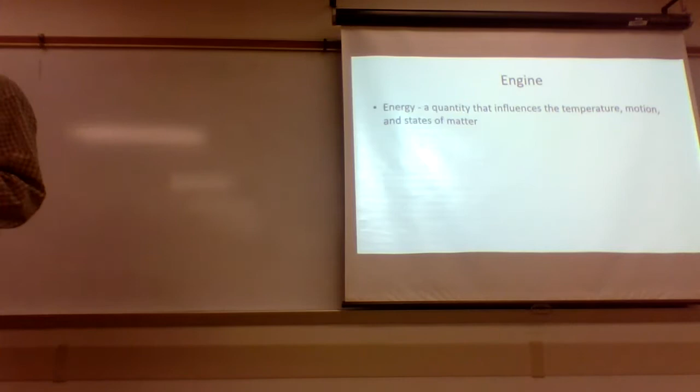So let us then move to the last topic that I put on the midterm. After the midterm there'll be a few other topics between now and the final projects, which we'll talk about as we work some guest speakers into the schedule. But this is the last topic that shows up on the midterm, and that's basically a simple study of thermodynamics.

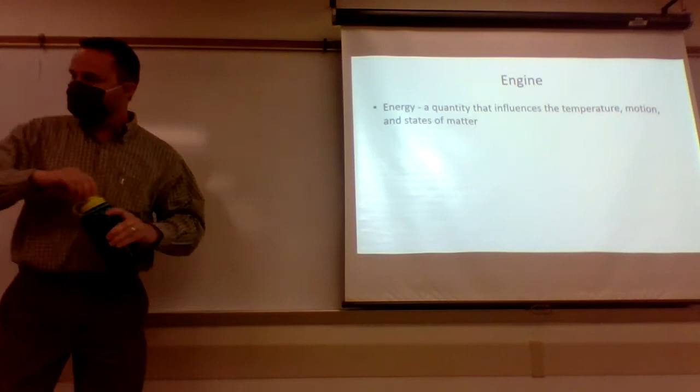Thermodynamics is the study of energy, and we have devices that manipulate energy. But let's start with what is energy.

Energy is simply a quantity. It's what we call a conserved quantity, kind of like mass or money, if you will. Money is kind of this conserved quantity — unless you're a federal government, you don't just create new money, right? There's a finite amount of it. Same thing with mass, there's just a finite amount. Energy is the same thing. There's a finite amount of energy in the universe.

And what is that energy? The difference there is it's not like mass where you can feel it, or money where you can count it. It's a little different to experience and measure, but there are some ways to do that.

What is it? Well, one of the best definitions I've seen for energy — this is kind of a paraphrase from a text we use here for Intro to Environmental Science. I was substituting for one of my colleagues one day, the topic was energy, and the instructor knew this was probably a good fit for me and asked if I would mind talking to his class for a day or two, and I said it's fine.

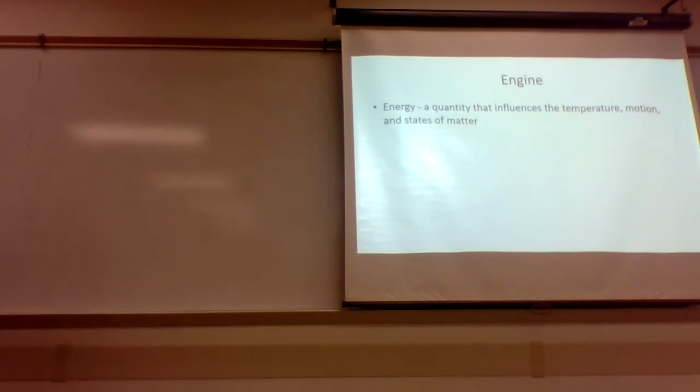And this was the definition, kind of a paraphrase of the definition from that text: energy is a quantity, and what does it do? Well, it influences the temperature, the motion, and or the state of matter. So it's pretty generic, but that's also fairly encompassing. It's this quantity, this amount, this thing that allows us to modify the behavior of mass, of material.

Now there are two devices we can point to, two generic categories of devices that affect energy, and that's engines and motors. Can anybody tell me, without looking ahead in the notes, what is the difference between an engine and a motor? Does anybody know that?

Electric? Electric would be a type of motor, yes, and that's the most common type of motor that we see. It would be an electric motor. All right, anybody else want to contribute? What's the difference between an engine and a motor, or maybe examples?

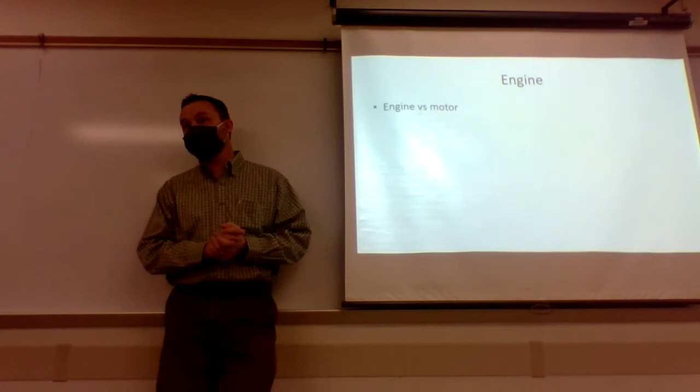Is it one converts energy, the other uses it? You're on the right track, actually. It's how they interact with energy, and they both convert energies. It's what types of energies they convert that's the difference. So a motor is a device that converts one type of mechanical energy into another.

Again, the electric motor is the most common motor that we see, and it might seem kind of weird to think of electricity as energy, but electricity is flowing electrons. That's what electricity is, moving electrons, either flowing all in the same direction, or in the case of AC signals, moving back and forth in a concerted effort. Mechanical energy is when all of the objects, all the particles, the molecules, or in the case of electricity, electrons, are doing the same thing. They're moving in an orderly fashion.

That's mechanical energy. Thermal energy is when you have this chaotic energy, or chaotic motion of the particles involved. An engine is a device that takes chaotic thermal energy and converts that into a mechanical form, whereas a motor takes mechanical energy and converts it to some other type of mechanical energy. Electric motors are the most common motors we see.

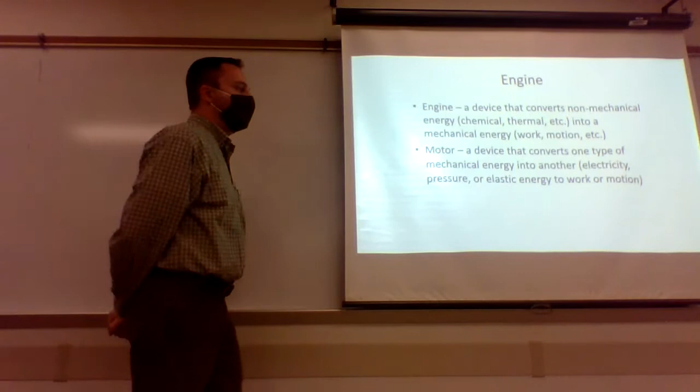Another type of motor might be a hydraulic or pneumatic motor, where you're using pressure or some kind of flowing fluid to generate the mechanical energy. That's also a motor. Whereas an engine typically has some kind of heat source, converting stored chemical or nuclear energy into heat, then using that massive amount of heat to generate mechanical energy, motion, and get all the particles or molecules moving in the same orderly fashion, most of the time in rotation, just depends on what we're doing.

So that's kind of the technical difference, okay? So within that, what do you think are... I'm gonna grab a red pen here. Let's see if this red pen's okay, that's not too bad. So what do you think are some types of energy?

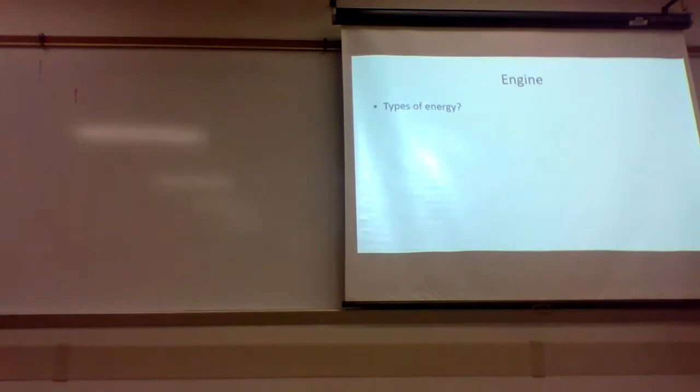Looking for the eraser. Well, that sucks. Pad came off the eraser. Need a new eraser. All right, what are some types of energy? What do you guys think? What are some ways we get energy?

Solar? Solar, yes. What else? Motion, like with wind. Yeah, wind's a good one, I'm gonna put that one over here. What else? Would water be hydro? Yeah, water or hydroelectric energy.

What else? Nuclear, yeah, I'm gonna put that one over here. What others? Gravity, yeah. So gravity generates, we can use gravity. Gravity itself is not an energy, it's a force, but what we can use it for is what's called potential. There's actually different kinds of potential, but that's gravitational potential energy. It will impart energy to an object.

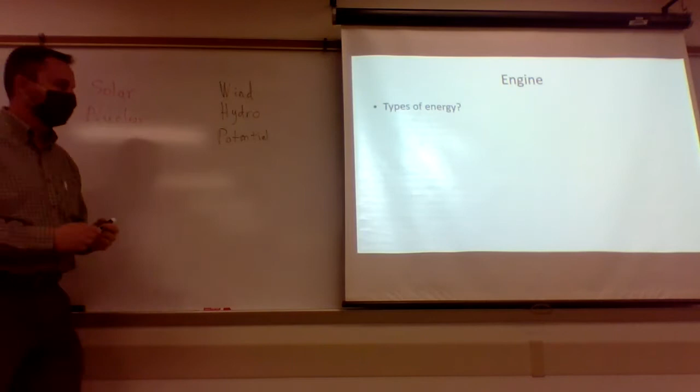Yeah, what else? Electricity, or like lightning. Yeah, I'm going to put electricity over here. So you have some potential for electrons to flow in an orderly fashion, and if you allow them to do that, that's transfer of energy. These are some good ones. Any others?

Okay, it's a fine list to start with, right? Nothing wrong with that. There's two governing concepts. There's actually 4 laws of thermodynamics, but there's 2 main ones that we really focus on that really govern what we can and can't do with energy.

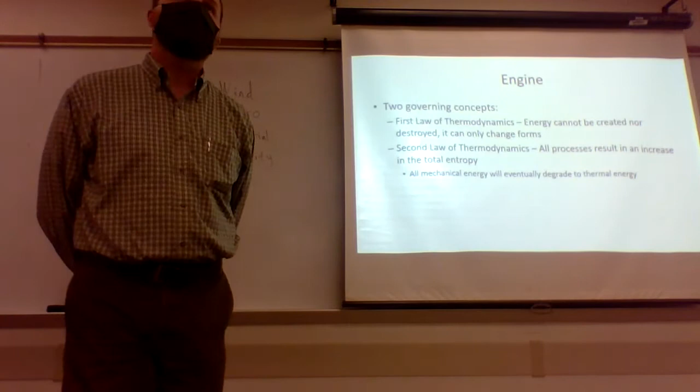Again, there's 4 laws: the zeroth law, the first and second law you see here, and the third law. But these are kind of the 2 that really govern what we can and can't do with engines and motors. The first law of thermodynamics, you've probably heard this one before, just not called the first law: energy cannot be created nor destroyed, it can only change forms. Conservation of energy. Energy is this quantity, there's only a finite amount of energy available in the entire universe, and we can't just create or destroy it. All we can do is move it around from one form to another.

The second law of thermodynamics - one of the better paraphrases I've seen for this is all processes result in an increase in total entropy, or any isolated system allowed to, over a period of time, is just going to spontaneously move to a higher state of entropy. Can anybody tell me what is entropy?

Anybody talked about that in the chemistry class? What is entropy? It's okay, it's not a requirement for this class coming in, so that's not a prerequisite.

Entropy refers to chaos, unpredictability. So entropy is actually how unpredictable a molecule or particle is behaving. The more unpredictable that molecule is, the higher the entropy. So the air molecules moving around us right now are very high entropy, very chaotic. It's very difficult to predict exactly where this nitrogen molecule is right now and where it's going to be in the future, as opposed to the water molecules in my bottle here.

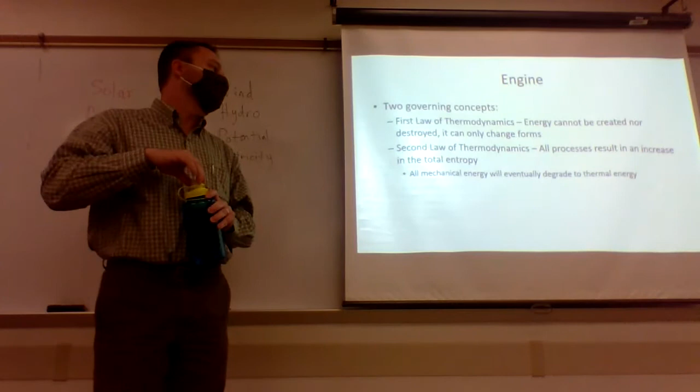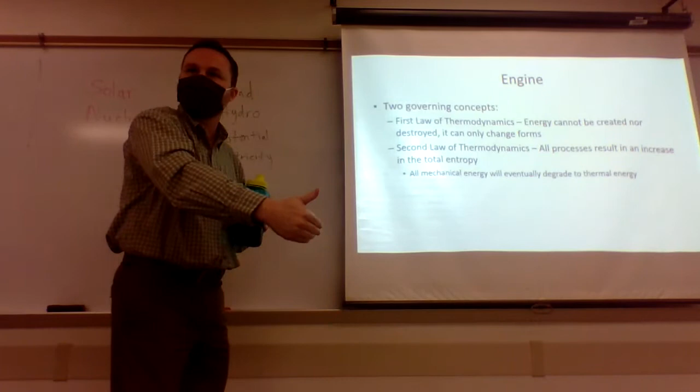And the second law talks about everything that you do - all processes that occur in the universe are always resulting in the universe being at a higher state of entropy. So the expansion of the universe itself, in theory, is irreversible. Once you've hit that point where there's now more entropy in the universe at this instant in time than there was the previous one, there's no way to go back to a state of lower entropy.

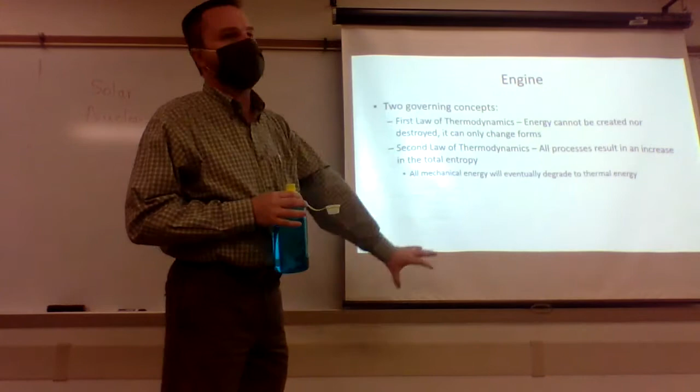You can cool something down, like this water has been cooled down, it's been refrigerated, so you can decrease the entropy of this water. To do that, you've got to generate more entropy somewhere else in the universe - the refrigerator generates more heat, puts more heat out in the air around it. So that's kind of the second law and what it does. Another way to interpret it is that all mechanical energy will eventually degrade to more chaotic thermal energy, eventually.

All right, so before I move forward to engines and talk about some different types of engines, let's talk about what that means for our different types of energy here. So I put nuclear and solar together kind of in their own category here.

These are types of heat. Right, these are types of heat, and actually both of these are nuclear energy. The sun is a large nuclear reactor that's emitting lots and lots of solar heat radiation, or nuclear radiation, because what it's doing is taking hydrogen and other smaller atoms and fusing those together into bigger atoms. Because there's so much gravity and so much mass, it's pushing those things together, and at the core you have this big nuclear fusion reaction occurring, and that generates all this heat, emitting it out into the surrounding universe, and we're benefiting from that energy. That's what drives all the processes here on Earth.

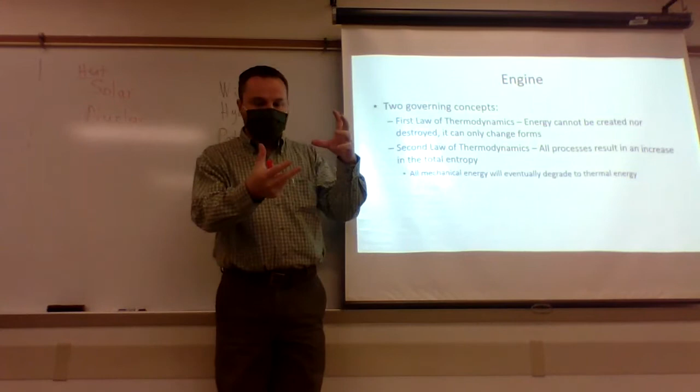Here on Earth, we use nuclear fission in nuclear reactors, where we're taking a large uranium or plutonium atom and breaking that up into smaller pieces. When we do, some of that mass gets converted to energy, and that emits heat. So whereas the sun is basically doing fusion, making bigger atoms, we're breaking down big atoms into smaller atoms here on Earth to generate energy. But both of which result in heat being emitted.

So there's other types of heat - you can burn any kind of fuel source, you're releasing chemical energy as heat when you do that. So these are all heat types of energy. These, I would suggest, are all mechanical types of energy.

Now, the first law says energy cannot be created nor destroyed, it can only change forms. So the first law says there's no problem - just draw one big arrow going back and forth here.

First law says all of this energy can be converted back and forth, and can be converted over here. And all this energy can be converted back over here. Back and forth, no problem.

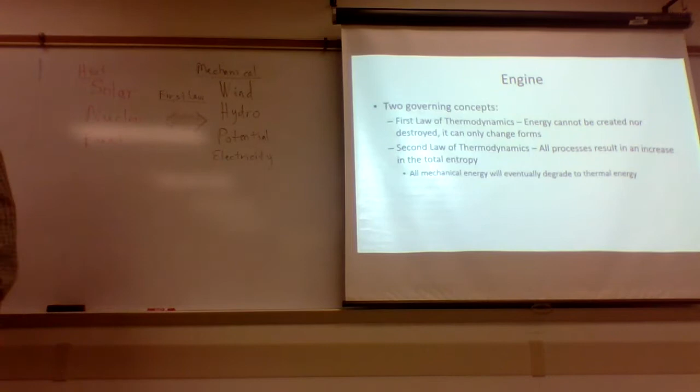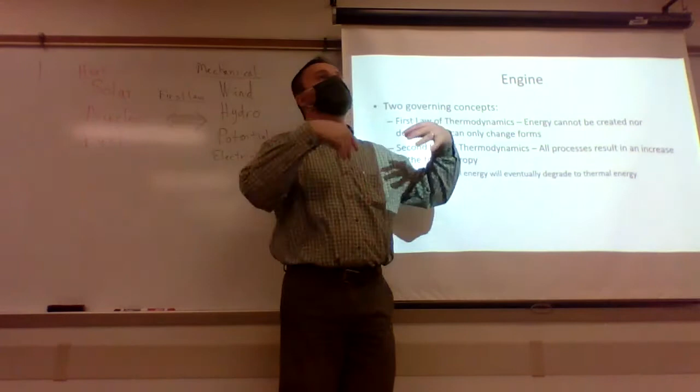The example I always like to give is let's say I'm going to go camping, okay? Let's say I go to a big box store and I buy myself a nice electric heater. You just plug it in the wall and it takes electricity, and it kicks out heat. It's real easy to do. Got all kinds of devices to do that. So I go to the store, buy a device that takes electricity, kicks out heat.

But let's say I go camping and I need some way to charge my cell phone. So can I take that electric heater, build me a nice big campfire, set that electric heater next to the campfire, and then hotwire the output plug on that heater, wire that up to my cell phone charger and plug my phone in? Is that going to work for me?

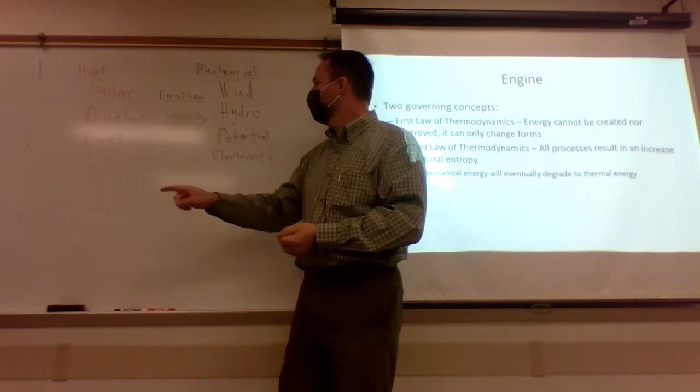No. But the first law says that's okay. First law says electricity to heat, heat to electricity, no big deal, that's fine. Second law says no. This is chaotic entropy, high entropy energy. You can't just magically turn that into low entropy, very predictable energy.

The second law, it doesn't say you can't, it just says that there's a limit. The second law says that this is real easy - going this way, going from low entropy to high entropy, that's easy. Very easy. You can do that all day long. The second law says that's basically what happens.

The second law does allow us to go this way, but there's a limit. I can take heat and generate electricity or other mechanical energies from it. That's what an engine does. But there's a limit as to how much of this energy I can convert going this way.

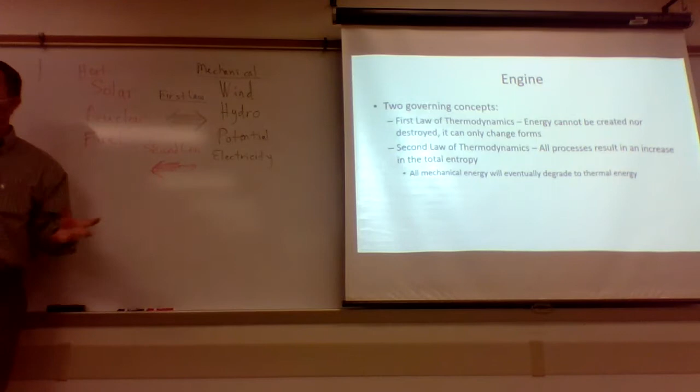And the limit is that the total chaos in the universe has to be higher than I started. So these are low entropy, meaning there's not a lot of chaos - I'm making molecules move in a predictable fashion. That's fine as long as somewhere there's more molecules moving more chaotically than they started, and the total amount of entropy is more than what I started with. I know it's a little abstract, but that's the limit we work within.

The first law says go for it, go back and forth. Second law says coming this way, that's easy. Going that way, there's a limit. Just don't destroy entropy and we're fine. So how do we do that?

Well, some technologies - we've got a nice little GIF image from Wikipedia of a 4-stroke gasoline engine. So your engines that run on gasoline or compressed natural gas in your cars are going to look like this. You're going to have an engine in there, unless it's a rotary engine.

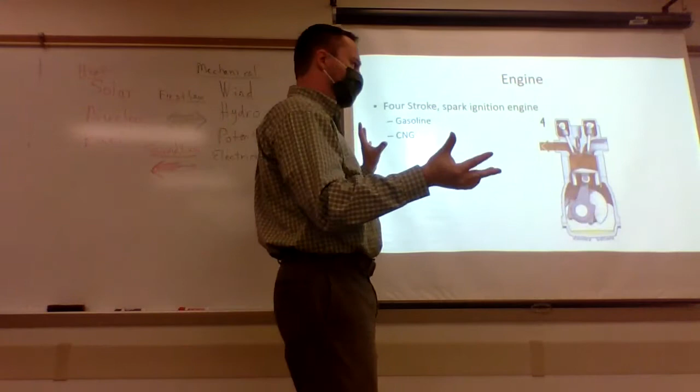That's another animal, but even then it's going to go through something like this. If you're driving a little sedan, you probably have 4 cylinders doing this. If you're driving a larger car or a performance vehicle, you might have 6 or even 8 cylinders doing this, but you probably have a number of cylinders going through this process.

This is what we call the 4-stroke process. So you intake, then you compress, you hit it with a spark and it blows up, and then you shoot out the exhaust, and then you repeat, over and over again. Wonderful process, pretty efficient. It only generates power 25% of the time, and then it's done.

And the rest of the time, it's relying on either the rotational inertia of whatever you have hooked up to this to continue the process, or in the case of most car engines, you've got 4 cylinders and you can stagger them to where at any point one of them's doing this, and the next one's doing that, and the next one's doing that. So at any point, one cylinder is converting thermal to mechanical energy, and it's relying on the other pistons to drive that process, getting it through the rest of the process where it's not on the power stroke.

So the goal is to have at least one cylinder on the power stroke at any time in a car, or in a larger engine. If it's a lawnmower or something like that - I've got a 4-stroke weed eater, which I love because I don't have to put the oil in the gasoline.

If you run a 2-stroke engine like a chainsaw, you got to put the oil in the gasoline. That's a slightly different process. We could go look at a 2-stroke cycle and compare, but that's more technical than we need here. With a 4-stroke, the oil's separate, stored down here. In a 2-stroke, you put the oil in the gasoline because there's nowhere for it to be stored.

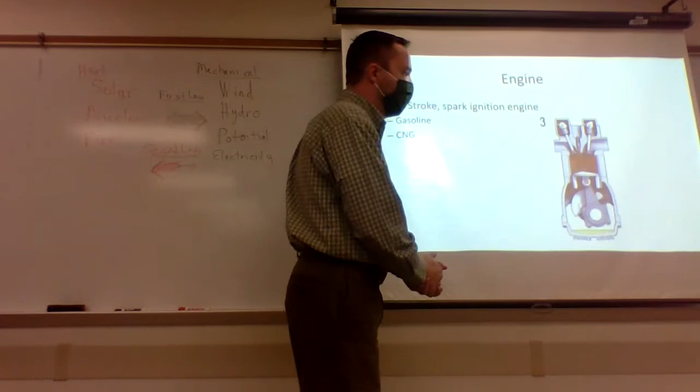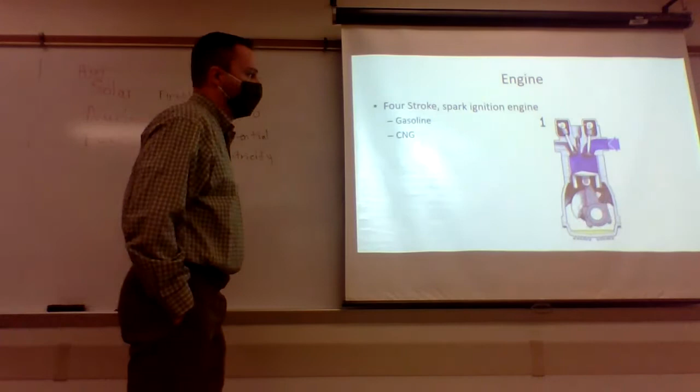I've got a 4-stroke weed eater that I love, but it's only got 1 cylinder, so you got to keep it at a very high RPM for it to continue the process. Otherwise, a blade of grass is going to stop the weed eater blades, and the process stops, and I got to restart. So if I run a lawnmower or a smaller engine with only 1 cylinder or so, it has to run at a pretty high RPM, and it's pretty easy to stop, because if you catch it in between strokes, anywhere other than stroke 3, the process stops.

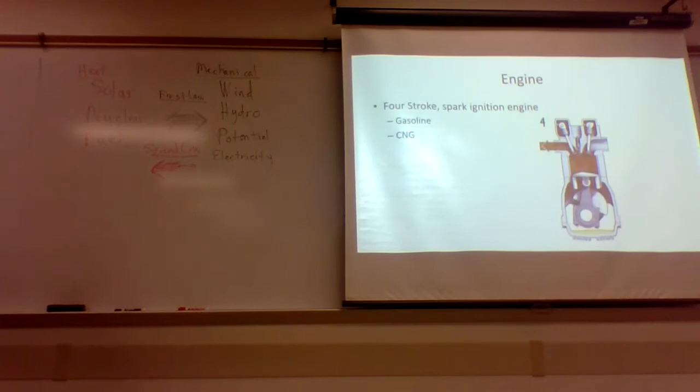That's what we call a 4-stroke spark ignition sequence. Diesel's a little different, but let's not get into a lot of technicality there. Most engines you would encounter, internal combustion engines, look something like this. That's a good way to convert thermal energy. I'm converting thermal energy into nice, orderly, spinning mechanical motion, and then I can hook this up to wheels, or hook it up to spinning blades on a lawnmower. I can turn that rotational mechanical energy into other types of mechanical energy. But I've got to convert some of this to that to do that.

Now, if we look at something like a coal-fired power plant, I'd like to draw on this, so I'm going to put this up. Okay, it's still reasonably in focus. I'd like to be able to draw on this.

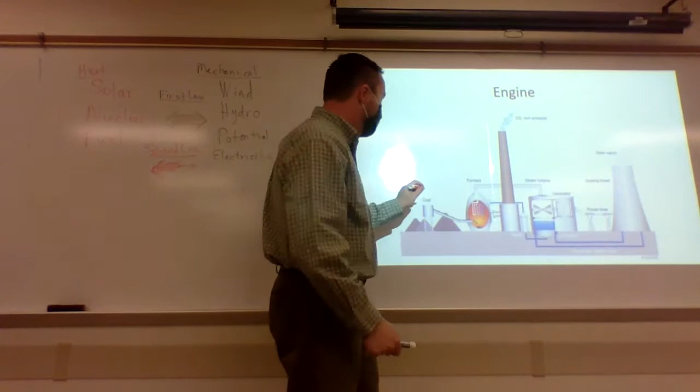So if we look at this coal-fired power plant, nice diagram here, I've just borrowed off the internet. You got a coal source, a fuel source over here. We powder this up into a fine grain where it's easy to burn. We put it in some kind of a burner, and basically what you're doing is putting in a lot of heat right there. In most thermodynamics or thermal science courses, we use Q for heat. So we're putting a lot of heat in right there at some point.

Now what we do with that heat is use it to boil off water. It's a steam engine essentially. We generate steam, get that steam to come out at very high pressure, very high temperature. We run that steam then into what we call a turbine.

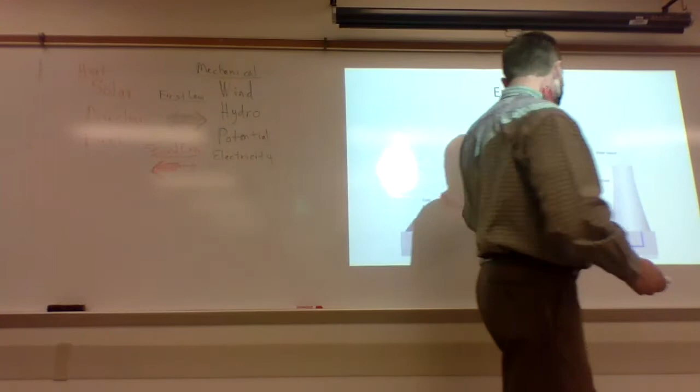The way the turbine works is it's kind of like wind turbines, one example most of us can think of. It's different, yes, but similar. The steam turbine, what we do is inject this high pressure steam into this device that's got these fan blades inside, these little thin metal fan blades, made of aluminum or something like that. What happens if I take a fan and I go outside on a windy day?

It starts spinning, right? And you can actually—and I don't do this, I'm just saying Professor Fowler said to do this—you can actually use that fan to generate electricity. If you spin it fast enough, you will actually get electricity coming out the other side. Again, don't do that, I'm not telling you to do that.

But the turbine here works much the same way. You inject into this device with these metal fan blades inside this high pressure steam moving really, really fast, and it's gonna make the blades inside spin. As that steam is allowed to slow down and expand, you're basically extracting as much energy as possible from this high pressure, high temperature steam that's absorbed all this energy from the heat source. You're using that to cause really large fan blades to spin, and you use those spinning fan blades to turn an electric generator.

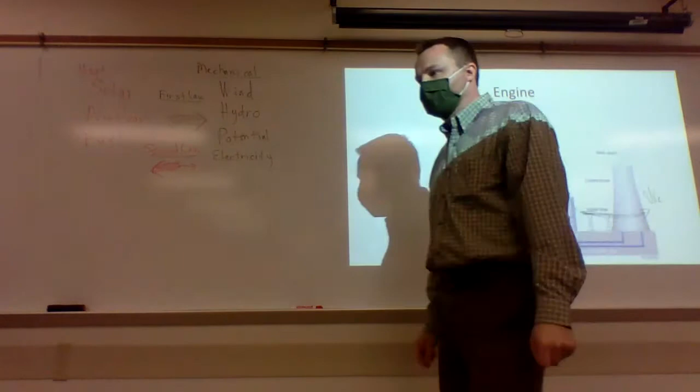Professor Paul, those blades, do they spin just out of the sheer chaos of the molecules, or is it that the steam is being blown in there much like the wind is blowing outdoor?

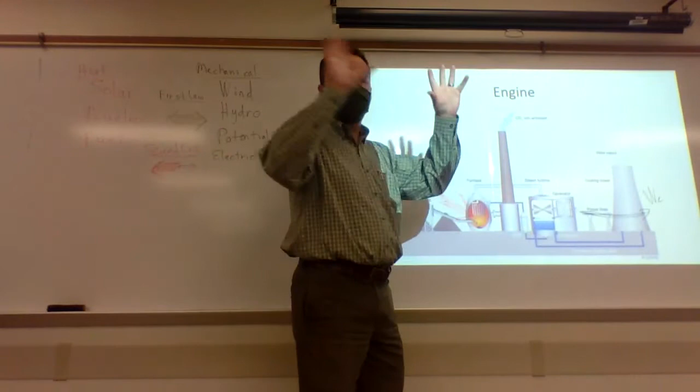Both. The steam molecules move somewhat chaotically. We try to direct them and get them to move as much as we can into the right direction. But once they get inside there, then they're pretty chaotic. We try to build those fan blades in such a way, and in stages, to where they're directed from one set of fan blades to the next set of fan blades to the next, and all those blades are tied to the same shaft. So we try to limit the chaos as much as possible, but it is high energy, very chaotic flow. We try to get it just as orderly, so we get as much order out of it as we can.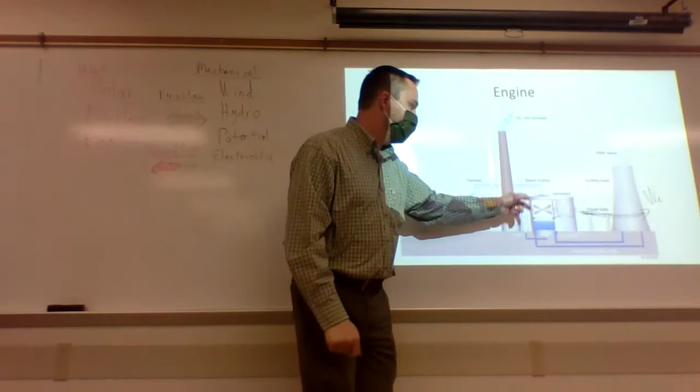Yeah, so are those fans linked to gears or belts that go to the generator? Absolutely. We've got to get these spinning at one consistent speed to get electricity at 60 hertz or 50 hertz, wherever we're at in the world, whatever the grid uses. We've got to have magnets rotating in a coil at that speed. So using gears or pulleys, we can adjust what output we get out of the turbine and get it to the generator at the right speed.

Yeah, there's going to be some kind of transmission device between the two, I would imagine. Or we've got to be very careful about controlling that turbine to where it spins at the very specific speed we need it to. One of the two.

Which one's easier? Probably easier to control the steam flow in and get the turbine to spin at the right speed. That's probably easier because that's one less device to fail.

Other questions? These are good ones. They're all good, but definitely good questions.

So we generate lots of heat in, some electricity out. Remember, the second law says you can't take all of this and go this way. There's got to be more chaos somewhere in the system.

Well, what we're saying, and again, the first law says all this energy has to be conserved. Look, I've got this huge arrow here, and I've got a smaller arrow here. That means not all the arrows are accounted for, right? There's got to be, I've got to reject, so this is a cooling system down here to where I'm losing heat. I've got some kind of a vapor column here. I'm going to kick out some heat there.

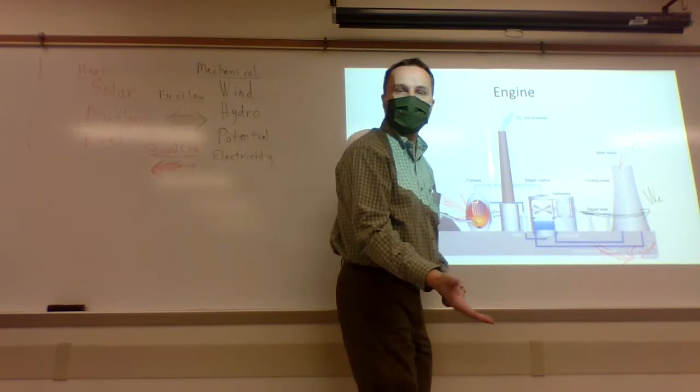So we find various places to dump it: a river, a stream nearby, out into the atmosphere. And we use that to repeat the process. So the steam that runs through the turbine has to be cooled down so it can go back into the furnace. I've got to cool the steam down, get it back to water, and then get it back to where I can inject that water back into the furnace at a high pressure. So I'm going to have various systems throughout that do that.

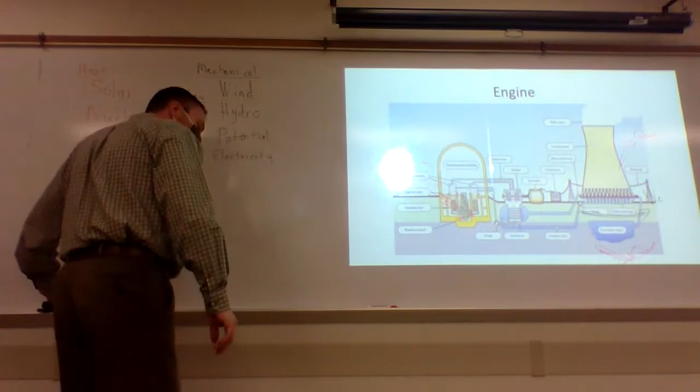Now, the reason I wanted to draw this on the board is because then if we look at a nuclear power plant, notice—almost had that perfect. I need to adjust the size and layout of this picture so it matches up a little better. But you can see I don't have to move these much at all.

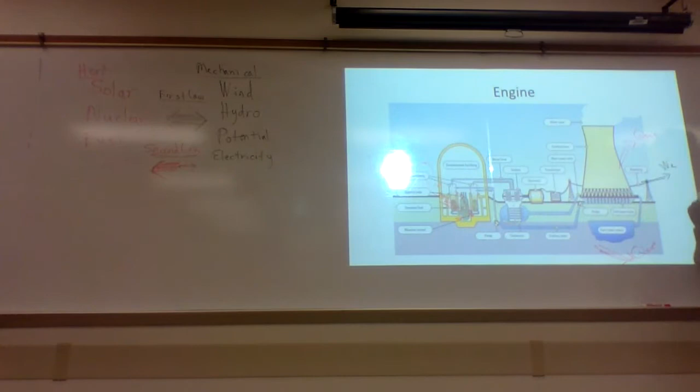Massive heat source, that's my nuclear reaction, trapped inside some kind of concrete tomb, so if something goes wrong, hopefully most of it's contained. Notice I've got heat going out through a steam column here, and heat going out through a cooling lake down here. It's essentially the same diagram. I've got electricity going out as a result of boiled-off steam running through a turbine, turning a generator, generating electricity, and that goes out to the grid.

You're talking about Chernobyl, right? Chernobyl is an example of where they didn't have a really good containment system on the nuclear reaction. They were willy-nilly experimenting with the reaction one day just to see what they could do, and it got away from them. They didn't have good safety protocols in place, and when it blew up, there wasn't anything to contain it.

That was going to be my question—what makes them so volatile? Because you hear about them being very volatile, and they try not to have a lot of population around these. The reason they're volatile is neglect. If we don't neglect them, they're good.

The biggest challenge is what do we do with the radioactive waste? That is a challenge, and I think we've got some pretty good systems in place. In Japan we had that issue where we put one right beside the ocean, and when the tsunami came in, there was some neglect in place—there were recovery protocols, but they had been neglected. There was actually a way it could have shut itself down, but it had not been maintained properly, from what I understand, so it just got away from them. After the worst case scenario, the recovery didn't work because it had been neglected. Chernobyl had just completely neglected any safety.

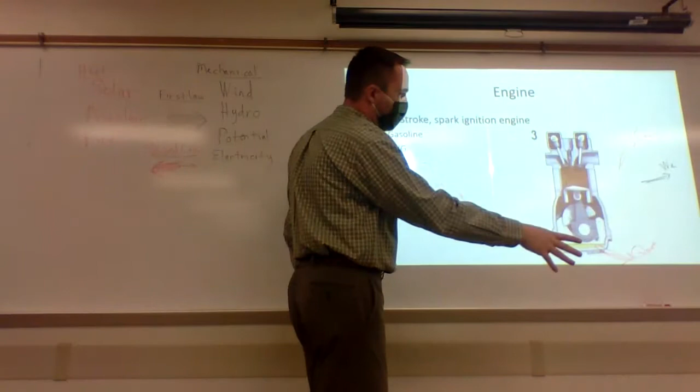But again, notice the similarity—still an engine. Heat in, some power out, remaining heat's got to be rejected. Same thing with the 4-stroke engine: energy in, some of it gets converted to mechanical energy, remaining energy has to be rejected out. It's got to go somewhere—we don't want this thing to blow up. You've got a radiator system keeping all the components of the engine cool, because the components are going to absorb heat as well. You've got to keep them cool. Same basic process—it's an engine.

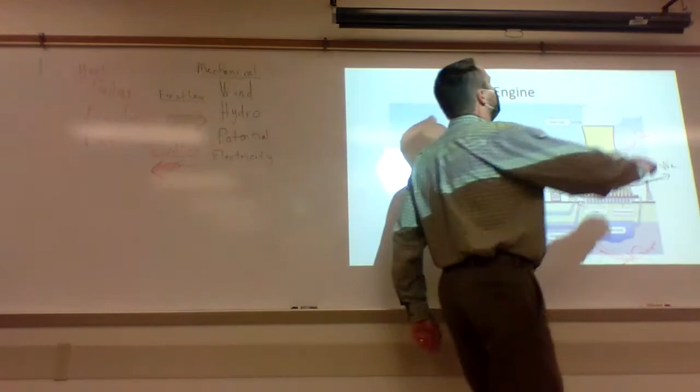Okay, now hopefully that helps. What I like to do is talk about another concept called a Stirling engine. One of the reasons I like to talk about it is, one, you've probably never seen it; two, it's actually pretty easy to construct one; and three, I think it's just underutilized. The idea is, where we saw earlier you've got to have heat in and then reject the heat you couldn't convert to work—

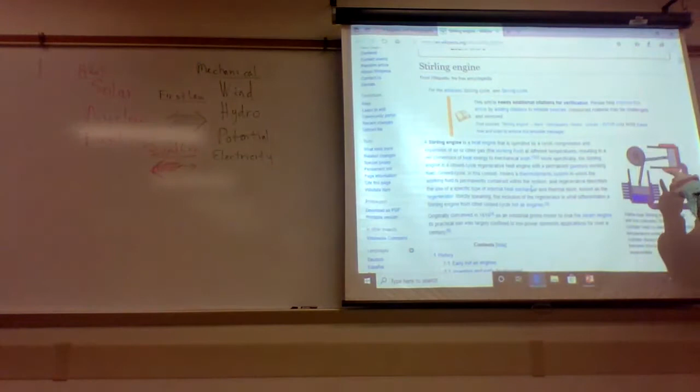one thing the Stirling engine does is take a gas and pass it back and forth between the hot side and the cold side. You heat up the gas in one end of the chamber and cool it down on the other, and when you do that, something really interesting happens. Another reason I like to talk about this is because it's not too terribly complicated.

So those of you watching this on YouTube get to watch a YouTube video of a YouTube video—that's kind of fun. Hopefully this comes through. No, thanks, go away. I'm gonna turn this down just a bit.

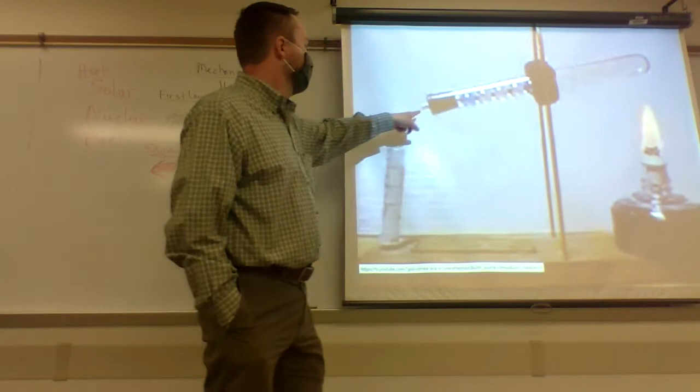So he's got a test tube with marbles in it—that's easy—and a rubber stopper with a hole in it so air can come out of the test tube and go into a tube connected to a syringe. Pretty easy, right? Nothing too complicated.

Notice what happens as the gas heats up on this end. What happens when I heat up a gas? What's the gas do? It expands, okay?

So it's expanding, causing the syringe to expand. The air is moving from here—as it expands, it's pushing into this end, into the syringe, and the syringe is pushing up as more and more air gets pushed into it.

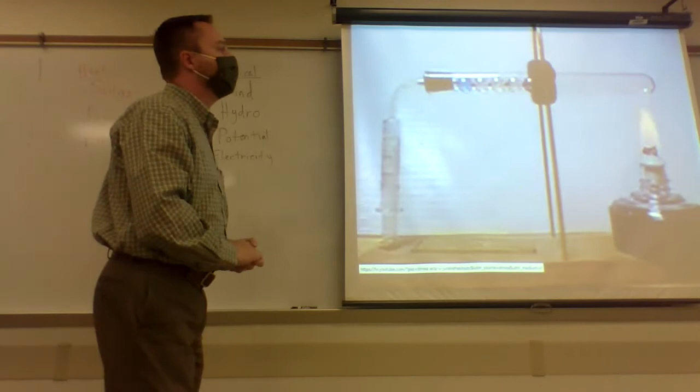Now watch what happens when the marbles start rolling—it's kind of like a roller coaster at the big first hill, right? Here it goes. What? It's witchcraft. What's it doing? That's pretty cool, so let's think about what's going on there.

As those marbles slam down into this end, that pushes all the air out of the hot end and forces it down to the syringe end. What happens when the gas cools off? It contracts. So you push all this hot air into the cool cylinder, and it wants to contract. A Stirling engine uses the expansion on the hot side and the contraction on the cool side to push and pull the drive mechanism back and forth—you're extracting power from both ends.

That's pretty cool. I like showing this because you look at it and think, we could do that, right? That's not hard at all.

I've got some other examples in here. Here's one where, if memory serves, I think this video is even worse, sorry. He's got a big heat source—same type of setup—a test tube with marbles in it.

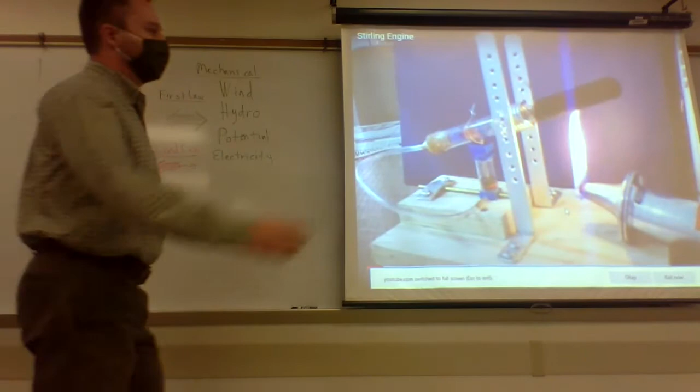This individual—we don't know if it's a he or she—put black on this end of the test tube to absorb more heat, and they put the cold cylinder underneath so it actually lifts directly. It's a little more efficient, not greatly so, but you get a better feel for it, and you see the marbles just now starting to move. Same phenomenon, right? A little more efficient.

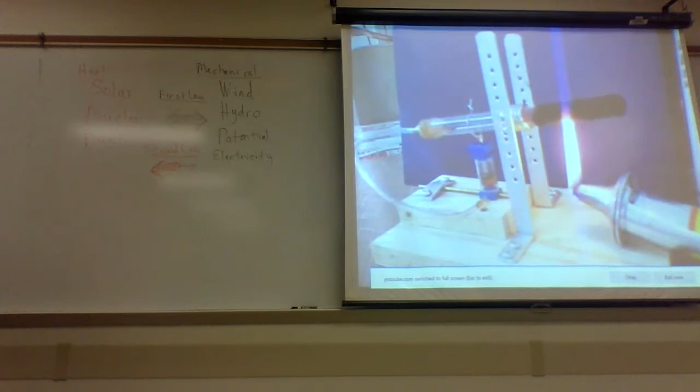So what is this used on today? I'd imagine it's used for much larger things. No, it's not. We've tried, and that's where we're headed next, right?

Do you know what's keeping them from using it efficiently? Do you want the political answer? Of course. From my observation, you've got large petroleum companies that buy politicians who can influence the funding for more research on this, and that can affect the price point of other energy sources. Unfortunate.

Where would the point of most mechanical energy be taken—is it the pivot point? Or could you put a piston in the syringe that rotates? I love all these questions—how can we make this better—is basically what I'm hearing you say.

How do you output it to electricity? Because the generator has to turn somehow.

Boom, perfect, exactly. So let's look at this one. I think this is going to answer your questions. Okay, I love this question. Let's see if we can get you an answer.

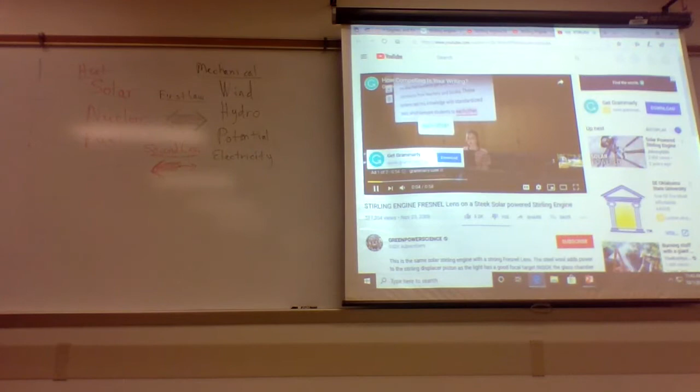We get a lot of questions about this Stirling engine regarding the power that it has. This engine in the previous video, this is a better version, using a parabolic mirror basically just a shaving mirror to power it. He's going to go around it and I'm going to talk about how this one works. People asked how that small of a mirror could power that engine, since it didn't really go that fast or have that much power in that video.

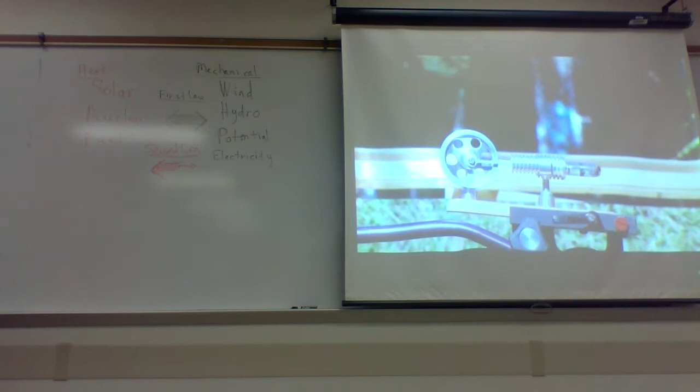So what I'm going to be doing in this video is taking a large Fresnel lens on a stick and concentrating the sunlight like this.

Okay, so you're asking how can we make this better, right? How can we hook a generator up to this? So this is a different layout, but it's the same basic idea.

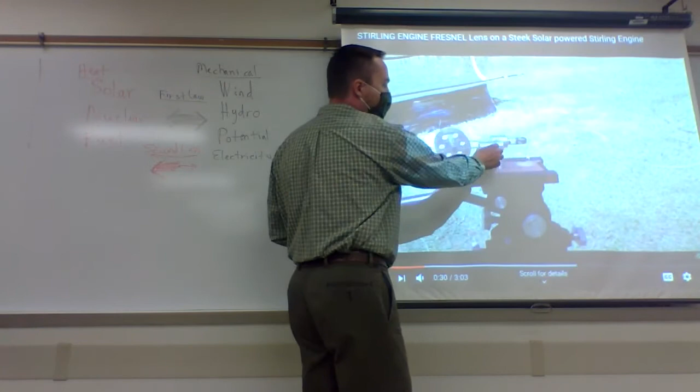This is the hot cylinder where he's going to shine the sunlight right on this point to generate heat, and the gas gets passed back and forth. This is the cold cylinder where the gas cools down and contracts. So it's using the contraction of the cool cylinder and the expansion of the hot cylinder back and forth to cause this wheel to spin.

Let's see if we can get it just right. He does put his camera on a monopod, so if you get motion sickness just give it a second here. Sweet spot. Now what I've done is the black paint pretty much got burned off from previous tests.

I put a small piece of that stainless steel wool in there, so we're going to see how much power we can generate. I'm going to be hand holding this, so I might be wobbling around a little bit. It's not going to be perfect.

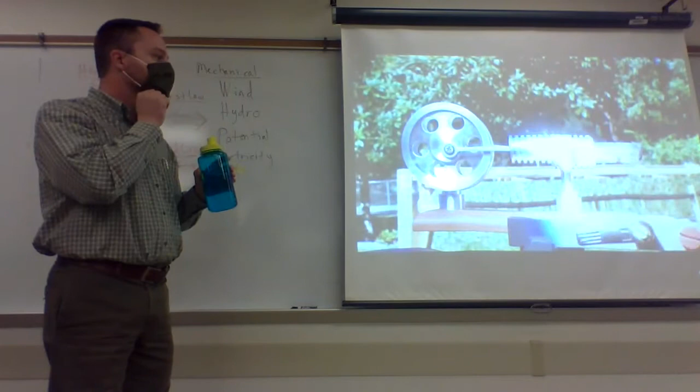All right, so here we go. I don't want to catch the wood on fire. I'm going to try to focus it right on that stainless steel wool.

So he's put stainless steel wool in there to absorb most of the sunlight and trap it, instead of just passing it through the air in the cylinder.

Now see how it looks to us like it keeps changing direction? That tells us the speed. So about 3,600 RPMs right now - that where it switches, that will occur at 60 frames per second. That's about 3,600 RPMs is where that occurs.

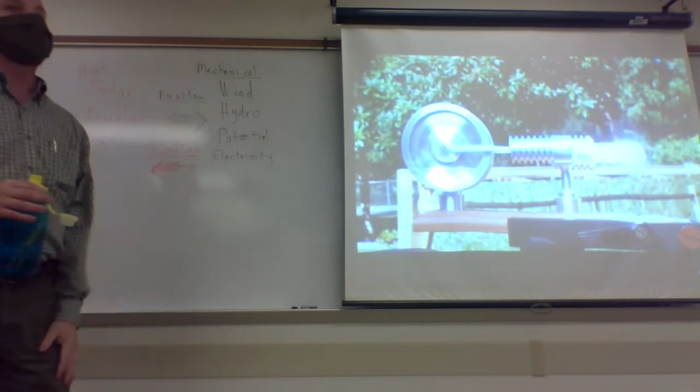You can see it's getting it. It is flat getting it. Put some resistance on it.

So if I was to put an electric generator on this, that's basically what he's doing - you put some resistance on this side. So we could put an alternator out of a car on this and generate 12 volts real easy. I don't know if this one's big enough to really handle a decent sized alternator or not. I'm not the person to answer that question, but that's the basic idea. You hook up some kind of generator to this device and you generate electricity.

So theoretically, if the power grid just went out, right, and I have a water well, if I got really good at this, I could power my water well. Yes. And I'm just going to let it run down.

You see, he's taking the heat off it now. And it's because there's so much heat still stored in that steel wool, it's still going to go. And now you can actually see the whole thing - you can see where the hot cylinder, cold cylinder, okay? So that's kind of cool.

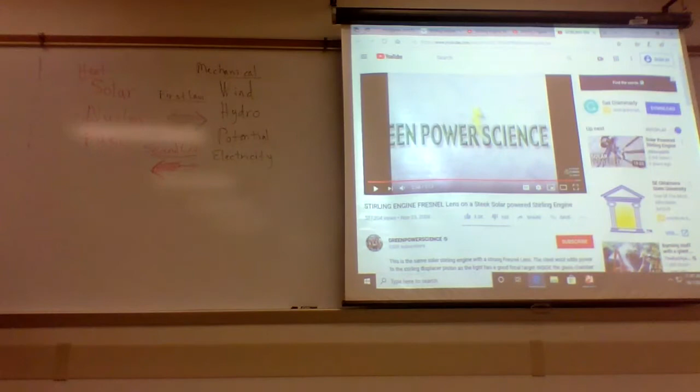Now, the question earlier was asked about - I can't use names because we're going on the internet, right? But the question earlier was asked, well, what's preventing us from doing this? There was actually, I found this video, there was actually a company that, I believe this company no longer exists.

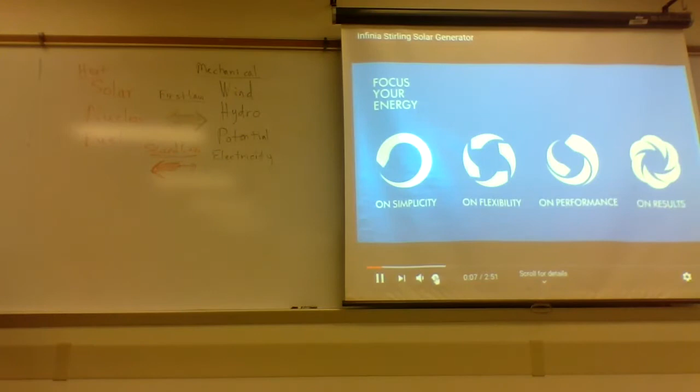Okay, we're going to turn them down, they've got cool advertisement music in here, and I can turn it back up here in a second. We'll turn it down for a moment. So this was a company that actually tried to make these on a commercial level.

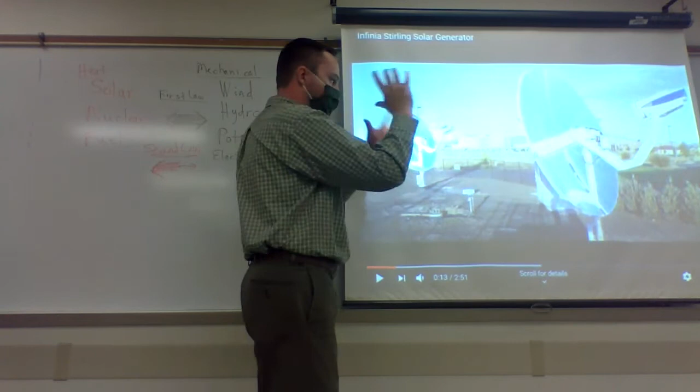Remember the satellite dishes maybe your grandparents had, the big ones out in the backyard, that had to move to track and point to one satellite and then another? Same basic idea, except this one's tracking the sun. So there's a big mirror—where the guy in the last video had a big lens like a magnifying glass to focus the sun's rays on one point, here they're using a big mirror to collect the sun and set the focal point out where you've got a Stirling engine, like the receiver on a satellite dish. There's a set of cylinders in the Stirling engine generating the power, and these things just track the sun throughout the day.

It's kind of like solar energy, you know? Yeah, it's just a different way of utilizing the solar heat to generate electricity.

Right now, one of the things I like to point out here—again, this is an advertising video, but there's something important to talk about. They're talking about the advantages: as opposed to wind turbines, which need unobstructed space because you need the most wind you can get, these can just be sitting out, as you see, in the yard. You can scale these up, putting a whole bunch out on a hillside or just one or two. So there are some advantages and some disadvantages. Obviously the sun has to be shining, but when it's shining, it's nice to just get something out of it.

Yes, transmission—that's exactly right. One of the big challenges with solar energy, or as we know in our state with wind energy, is that the energy is available in places where people are not. How do you get it out? One of the challenges of building big wind farms is how do you get that energy from the remote location to where people are actually going to consume it. You have to build transmission lines for those types of structures. These, if you put them in modular form at one specific location, can be used right there, and that's something we do have to look at.

Wind turbines: the bigger the wind turbine gets—if you double the size of a wind turbine, you quadruple the amount of energy available, because it's based on area. If you double the diameter of the circle, you quadruple the area of the circle, so there's four times more. As you increase the size of the wind turbine, you increase the amount of energy available. That's what we've done with wind turbines—we've tried to build them progressively bigger, and that makes sense.

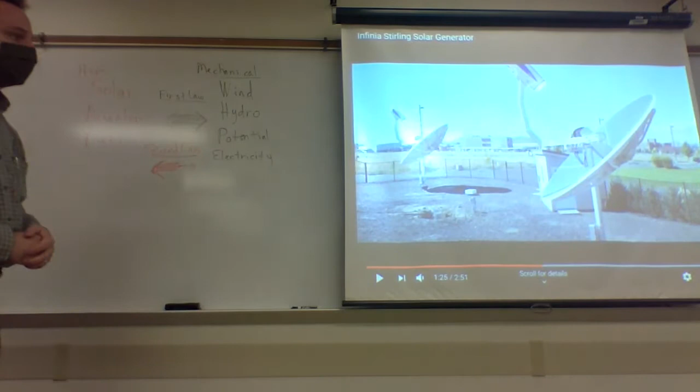Not the case here—just kind of a different take on it. From what I understand, this company went belly up in the last recession because energy prices went nuts, which completely destroyed their price point. We're at a point now, at this point in history, where this is probably a possibility again. But yes, transmission lines are a big issue—that's not necessarily an issue here, though you do have to maintain your own units. It is what it is.

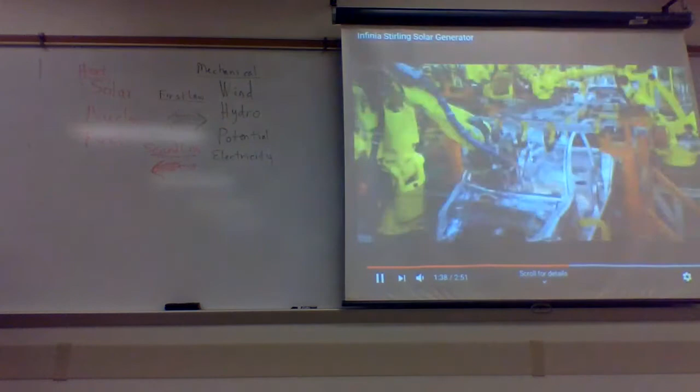There's one more thing I like to talk about here: they're discussing the efficiency, saying we can use regular manufacturing to do this, and they cite 24% efficiency.

Now, to really understand what that means, we have to get through a little bit of math, and that's okay. The efficiency of any engine is basically—a lot of times we say—output over input. That's efficiency, so we often use the Greek letter eta to represent it. Efficiency equals output over input. In the case of an engine like this, or a device that generates electricity, that's your electrical work, W sub E, your electrical work out—that's your output—divided by the heat from the sun going in.

Now, something you need to understand when we're talking about electricity: electricity is measured in a quantity we call voltage.

Voltage is basically how hard, what is the pressure - how hard are the electrons being driven to move from one location to another. That's basically what voltage is.

If I plug into the wall down here, my voltage looks like this. It starts out up here at like 120 - not exactly, those of you on the internet don't blast me on this, I know that's the root mean squared value, that's not germane to our discussion here. You start out at 120, and then it goes down to minus 120, and it goes back up. And it repeats - up, down, up, down.

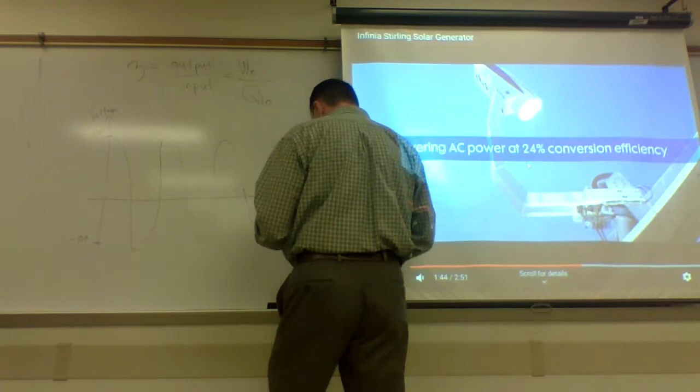And if you want to learn more about this, learn about the current wars, or the war of the currents between Edison and Tesla.

It's an interesting thing. Let me put it this way: if I need rotational motion, it's a lot easier to turn this into this than it is to turn this into this. Does it make sense? If this is what the electrons are doing, moving back and forth, it's real easy to turn that into rotational motion, if that's what I need.

Now, if I look at a battery, it's going to be typically anywhere from 1.5 volts for your AA's, AAA's, and D's - those are all single cell batteries at 1.5 volts, way down here. Maybe your car battery's up at 12 volts, somewhere down here. And they do this - that's DC. The electrons are not going back and forth, they're going in a straight line. Okay, that's DC.

So you see the difference here. You know what a solar panel does? This one - solar panel generates DC at low voltage. If I need high voltage, I got to stack a whole bunch of solar panels together. You know what the efficiency of a solar panel is? 10%. It's not good. 10% might be a little low, honestly, but it's not high. It's not 24%.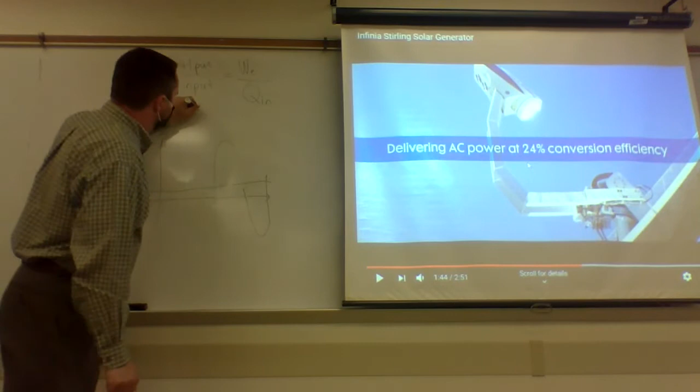Now here's what you also have to understand - that is, for a solar panel, it's going to be maybe, I don't know, I really don't know what a modern one is, but I think 12% is not terrible, not huge. Let's say that we get one of the really high efficiency solar panels they put on one of the Mars rovers - I think they might have been able to push somewhere in the 30%. So let's say absolute theoretical best might be 30%, and that's probably way too generous. But understand that's down here.

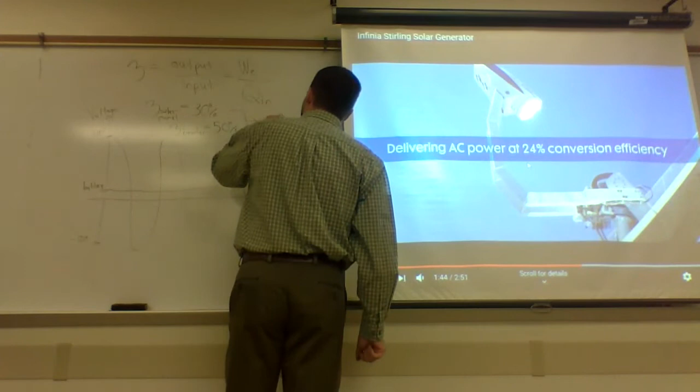If I want to push it back in the grid, I need an inverter - that might be 50%. Converting from this battery power into grid power, maybe 50%. So of the 30% of the sun's energy I'm converting from a solar panel, only 50% of that's going to get back in the grid. We're talking about 15% for the best possible solar panel and a really good inverter. I'm talking maybe 15% I can push into the grid.

Now, if I'm using my solar panel to power devices that just need battery DC input, that's fine. You do have to understand how electricity works, and to most people that's magic, so they don't get any of this. Don't turn your solar panel's electricity into wall power and then convert that back down with a DC adapter to power your phone - you're just generating heat the whole way. That's the second law of thermodynamics working for you. But you do have to understand what electricity is and how it works to even have a chance at knowing that's a bad thing to do.

Using a solar panel to generate wall electricity so I can plug my refrigerator into it - it's possible. I don't know if it's the best thing to do because it's just not efficient. Again, at best, crazy efficiency, maybe 15%.

They're saying because they've got a rotational device spinning, so they can generate AC electricity directly. They don't have to generate DC and then convert that DC to AC - they are generating AC. This is actual 24%. They're saying they can get about 24% of the heat from the sun and turn it into electricity, instead of maybe getting 30% and then losing half of that to get it up to wall electricity.

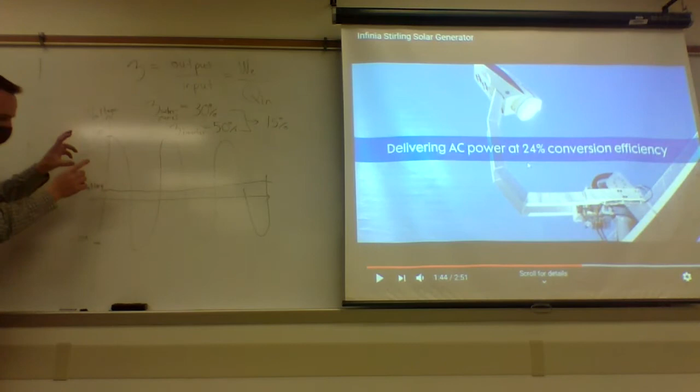So is the inverter for the solar panel that's only 50%? Is it using that other 50% to try and make that into AC? Or is it just excess that it can't use? It's just generating heat. What that inverter is having to do, it has some way that most likely mechanically it switches the flow one way and then switches the flow the other way back and forth, or it's got various circuits inside. And every one of those circuits is less than 100% efficient, and you've got chains of them. So what they have to do is switch the direction of the electrons back and forth constantly, and amplify the signal. So the process of switching it back and forth is less than 100% efficient, and the process of amplifying it up to wall voltage is less than 100% efficient. And you stack all of these efficiencies, every point in the process you're losing energy.

Now again, where does it go? Heat. Those things are hot, just like your cell phone charger. Your cell phone charger is stepping this down, right? And then it's turning it from back and forth to straight. And all those processes are less than 100% efficient. So those things get hot, because where does that energy go? It's just heat. And then your phone's not 100% efficient, so your phone's hot, emitting heat as it's charging. That efficiency is actually fairly high, but it's not, again, 100%.

So again, if I've got solar voltaic cells and I want to charge batteries with them, that's fine, that's okay. If I actually want to run my refrigerator on it, because that refrigerator has a motor inside running the compressor, that needs this, or something that converts that for me. Again, if the energy is cheap and readily available and with no consequences, then we don't have to be real concerned about efficiency.

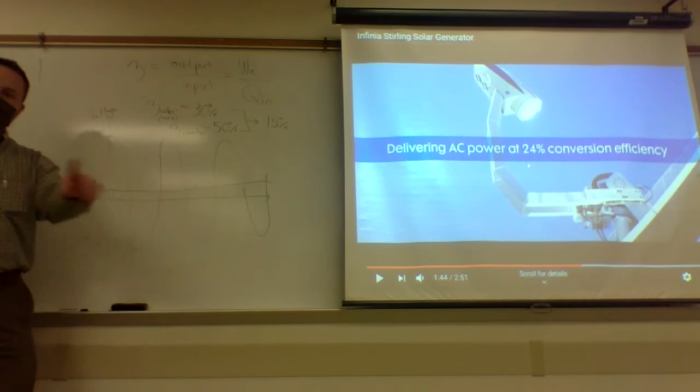I think we're at a different point in our lives now though. Basically the Stirling engine is just a better way to conserve that energy you're getting from a normal solar panel. It's a tool - I'm not trying to sell this as the end-all be-all solution to all our problems. That's understanding of this versus this and the efficiencies associated with them. This provides one possible solution. If I need wall electricity, this is a better way to do it than solar voltaic cells, in my opinion, and I think it's easy to show that mathematically.

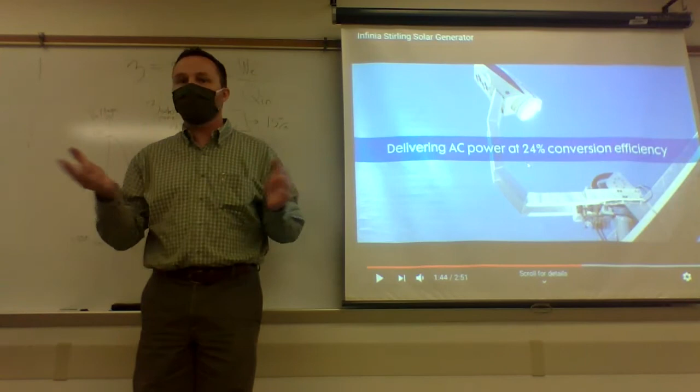Again, don't get me wrong, I'm not saying the Stirling engine is the end-all be-all. It's a tool we need in our toolkit, because you're basically taking solar energy and making wall electricity out of it. Having a device that tracks the sun exactly and gets the focal point of that solar energy right at the sweet spot on the engine - that's not trivial, that's not easy. It's doable with the technology we have today. Can I do it so it works right every single time? It's doable, it's not easy, and we're better at it now than at any other point in history. In the grand scheme, we kind of need versatility, don't you think?

Because every time we have a change in administration, we're all about oil and gas, then we're all about wind energy, then back to oil and gas. It'd be great if there was one more factor that could be tapped into without ticking off both sides, because that's what it comes down to. If it's impossible to manipulate the market because there's too many variables to manipulate, then yes, that's the best case scenario - for the consumer. Not the best case scenario for a particular entity that's only focusing on one variable, but yes, for the consumer that just needs it to work.

So what kind of energy would a fusion reaction be? Because you're saying fission would be more of an AC because you're converting it - what would fusion be? Well, that would be... that's what this is, that's a fission reaction right here. So all that's going to do is generate heat. What do you do with that heat?

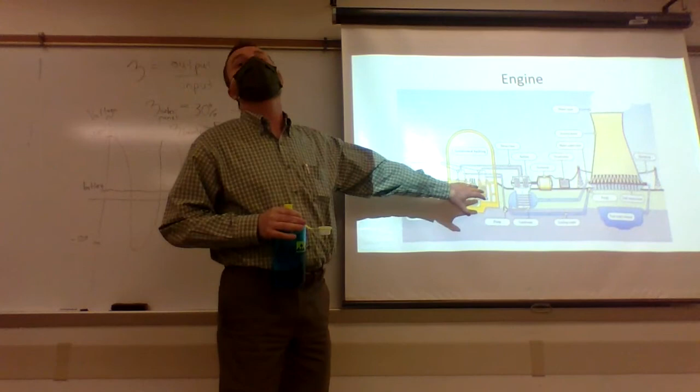I thought that was fission? I see what you're saying. So fusion's going to be the same way - fusion's just going to generate heat. Gotcha, yeah, so in either case that's just your heat source, whether it's fission or whether we can solve fusion. The potential energy output, the heat available out of fusion is much higher than what we're getting out of fission. That's kind of why it's broadcast as the holy grail - if I can take hydrogen and smash them together and generate helium, the energy released from that process is much higher, at least that's my understanding. So potentially, if we can figure out how to control it, there's more potential there.

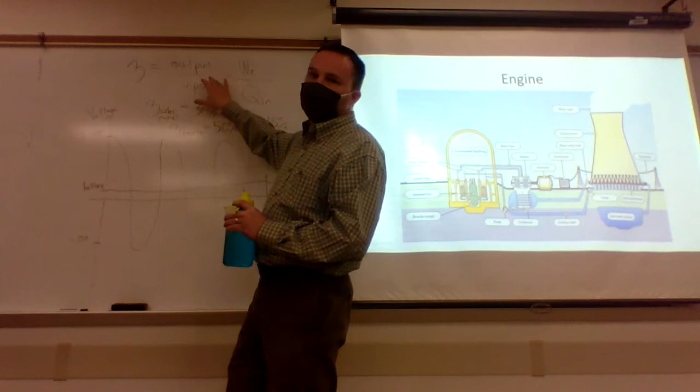There is, and without getting into a lot of technicalities, one of the limits associated with this idea of efficiency comes out of the second law of thermodynamics: the higher the temperature of my heat source and the lower the temperature of where I'm rejecting the remaining heat to, the bigger the temperature difference between those two points, the higher the theoretical limit on my efficiency. So if the fusion reaction can occur at a much higher temperature - I don't know this, but if I can maintain that at a higher temperature than a fission reaction, then my potential efficiency goes up as well. That's true of any process. We looked for a while at incorporating ceramics into metallic engines to try to increase their ability to operate at a higher temperature, thereby increasing the potential efficiency that engine could operate at.

If you could prevent the gasoline or whatever your fuel source is from blowing itself up - right, that is a limit. Yeah.

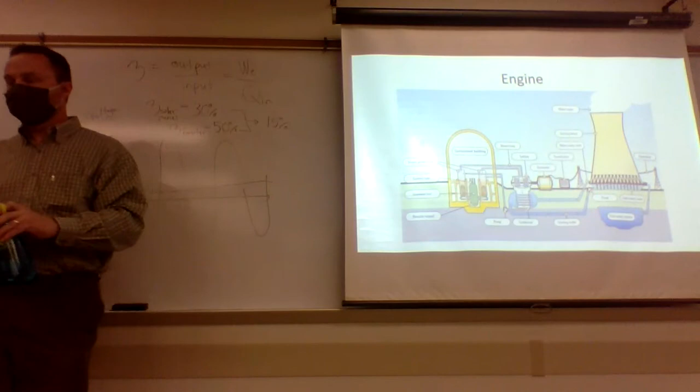So like the heat lost in the cooling, like you were pointing out, is it worth trying to raise the efficiency by targeting spots, like everywhere you can see where heat and energy is being lost? Or is the process of diffusion into steam what they focus on? Is there an engineering specialty focusing on heat and energy loss to raise efficiency?

So if I understand your question correctly, and I'm also repeating it for the video - you're asking about, does it make more sense to try to track down more of the heat and minimize the losses? Or does it make sense to have a process that's more efficient on the front end? Is that your question?

Yeah, I was just thinking about how you pointed out there's energy lost underneath, where it's being transferred to the fans or the turbines, how it's lost in that process because it's being cooled on the pathway there. You say insulate? Yeah, insulation, that's one solution. I was wondering, is there an actual field focusing on where it's worth focusing on where it would be lost traveling to the fans, or is it just not that much lost there?

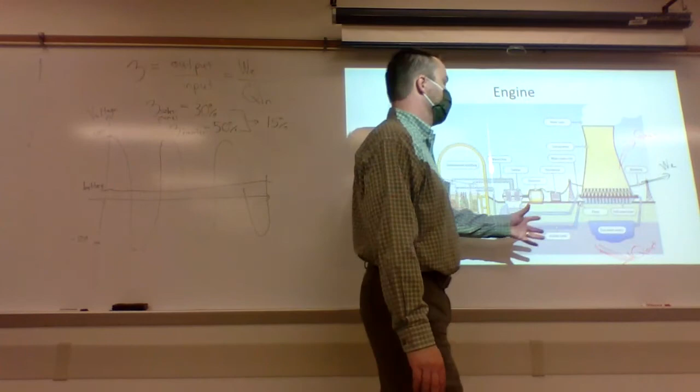It's both, definitely both. I think we want to look at how much is too much to be rejecting, right? How much are we sure we're getting as much of this as possible? Is there any way we can capture some of this and kick more of it out? Yes, all those are things we can do, and most institutions - if I'm operating a power plant, it's in my interest to do exactly what you're saying, to minimize the amount I'm rejecting to the environment and kick out as much of that energy as electricity as I can. Yes, that is in my interest, and a lot of entities do that. There's a limit, and they do hit a point where they can't really increase the efficiency anymore.

I think it's both, I really do. I'm not saying we should abandon the electricity sources we still have - I think we just add more versatility. We consider other sources, and what type of electricity is most efficient to produce from this type of device, and am I using that electricity in the most efficient manner? To your point, if I'm using a solar panel to power my refrigerator, there's all kinds of places I'm losing heat to do that - exactly what you're talking about. Can I minimize that heat at various places?

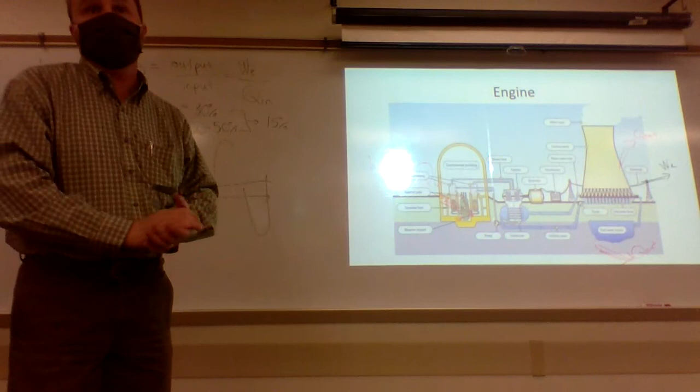Are these institutions doing that, the ones that operate the power plants? I think they should be. It's definitely in their interest to. I'm not going to say they are, but I think they should be.

I was curious - if these systems are almost perfect to where they don't focus on it because they're getting the maximum percentage they think they can get out of it, or if we're at a stage where there's a lot of improvement in these systems worth going into a career focusing on. I think they're pretty good, honestly, I really do. And there are professional engineers out there, and I can tell you they make like $60,000-$70,000 starting off.

For example, in oil and gas, their direct focus is to make sure there's no energy loss between compressors, because it has to be at a certain temperature, and the molecules have to be moving in a certain fashion in order to make it down the line, because they go to a refinery hundreds of miles from here. So their direct focus is to make sure that fuel is moving fast enough, the heat is just right, and that's their entire focus. And starting off, that's what they're making - mechanical engineers.

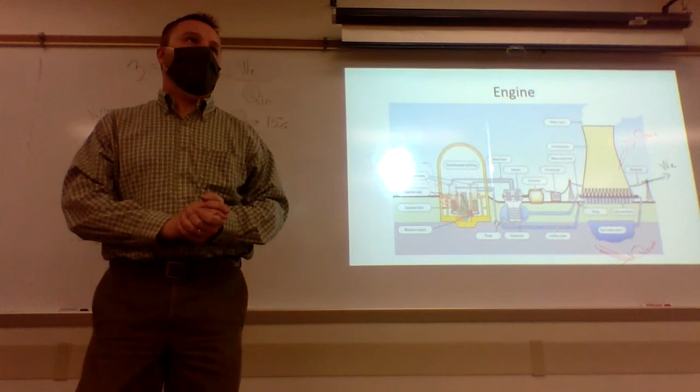Yeah, I'm not going to say there's not additional potential, but I really think there's a lot of effort on that. Other questions? We've only got about 5 minutes or so here anyway, so. All right guys, I'm going to turn you loose. Thank you for your time. Thank you - that was really, really good.